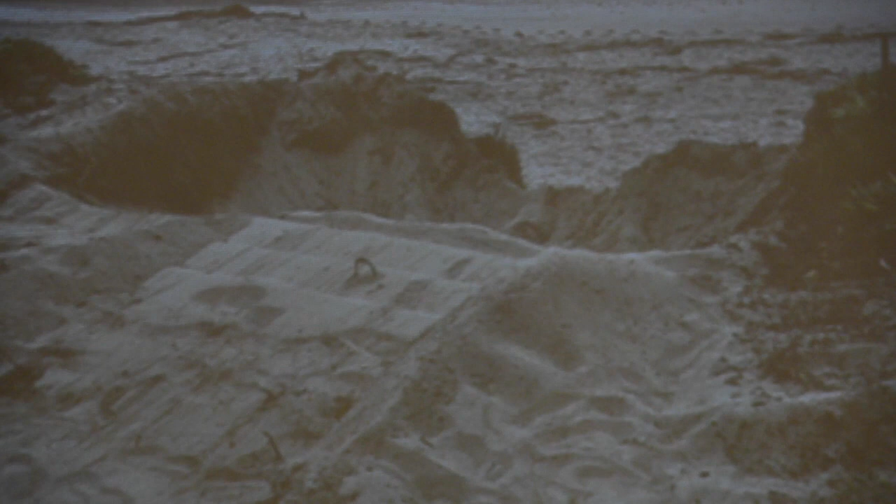Today I met on site with Daryl Sheffrey, the campground manager, and I've been talking to Tamara Geddick, the coastal analyst, working to come up with a plan to stabilize and clean up the site. We've got some ideas based on talking with Daryl. We still need to go back to the Coastal Commission. There's probably a good chance we can get on the consent calendar next time, unless they allow the work to go forward under an emergency permit, which they may. But I'm still working out some final details with coastal staff, so please be patient, I'll get it figured out. Again, I'm sorry for the miscommunication, I'm the one responsible.

Good evening, I'm Norbert Dahl. I represent John Van Hackle, as does my partner Stevie Dahl. Our client would not be in support of Caltrans remediating the violation without first presenting it to the community. Secondly, clarifying that Caltrans committed a violation of the Coastal Act, which is a very serious issue.

What specific section do you think we violated? 30600A, the requirement to get a coastal permit before any development. And you did grading, and destruction of environmentally sensitive habitat. No, that's not true, Ice Plant isn't considered sensitive. Dunes are considered ESHA, and I've been doing coastal management for 43 years.

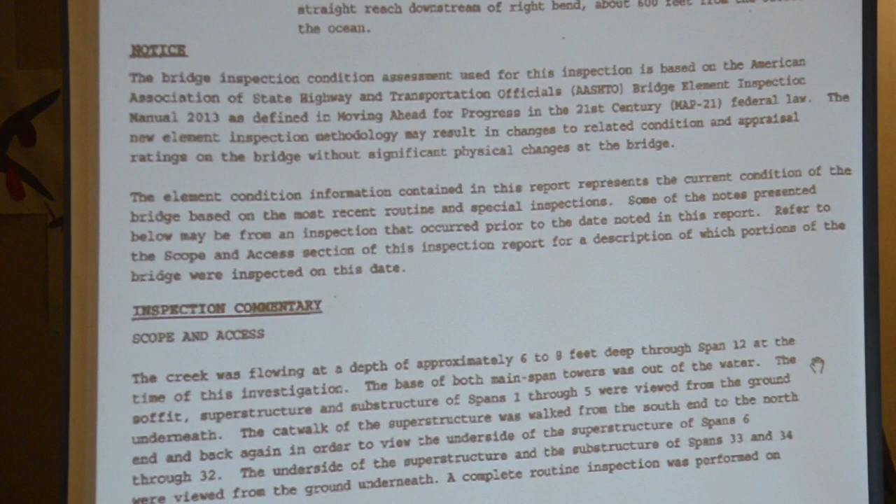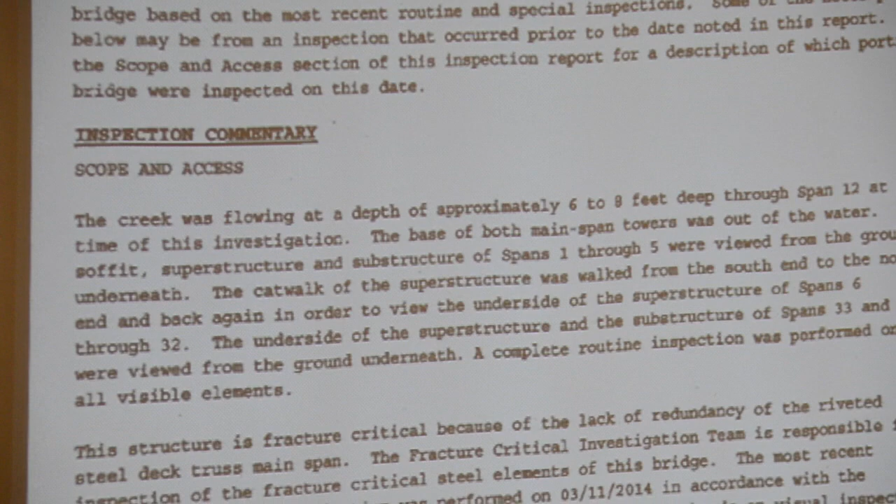Part of the reporting we do consists of a lot of commentary. We emphasize the written portion of our bridge inspection reports, and if one reads the reports, there's a lot of information contained in the commentary. But we're also required to digitize a lot of that condition into numerical data suitable for use in a bridge management system. These are algorithms used to determine basically the needs of our nation's infrastructure.

In 1972, up until the early 90s, the way to do this was to assign what was called a condition rating, or component rating, to the major components of a bridge structure: the bridge deck, where the tires really meet the road—that portion that supports the vehicles; the bridge superstructure, which supports the bridge deck; and the bridge substructure, which supports the superstructure. Each of those three main components was assigned a numerical value of 0 through 9, 0 being terrible and 9 being terrific. Those values are still used to this day. So when one talks about the component ratings or appraisal ratings, that's what we're talking about—these values of 0 through 9.

In the 90s, though, you can see that the simple assignment of a single digit number to describe a complex structure, such as the Albion Bridge or the San Francisco-Oakland Bay Bridge for that matter, was kind of oversimplified. So element level bridge inspection data collection was recommended by AASHTO, and Caltrans adopted that in the 90s, and we began collecting element level data. This means we took a complex structure like Albion, took the component of the bridge deck, and broke that down into its constituent subcomponents. Each of those subcomponents was assigned a specific condition, and the quantity of that specific condition was digitized. That occurred for the superstructure elements and the substructure elements.

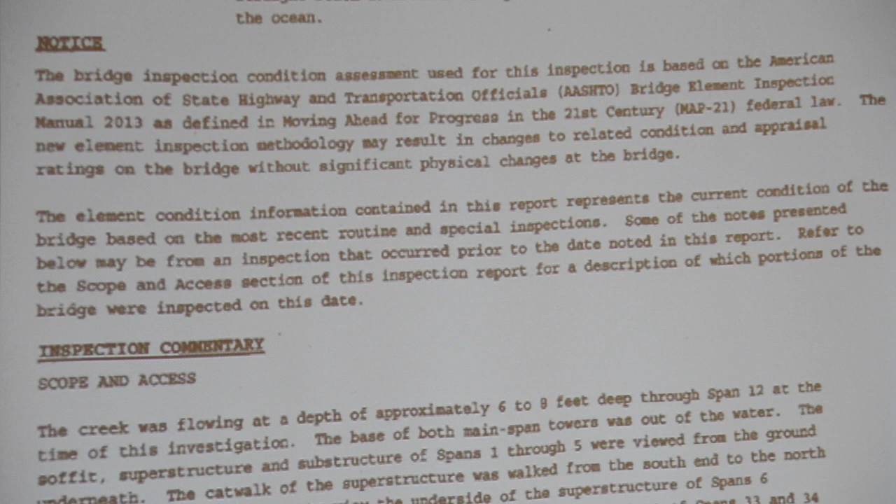But we based it on that, and we knew that there was going to be a change. We knew that when we did this, those component ratings that had been stable for some time were going to undergo a change under certain structures. So on our bridge inspection reports, we put this notice front and center. I don't know if you could read that, but I'll read the last sentence of the first paragraph: the new element inspection methodology may result in changes to related condition and appraisal ratings on the bridge without significant physical changes at the bridge. We knew that was a possibility, so we put that out there as a notice. All recipients of a bridge inspection report - keep in mind about half the bridges in California are owned by local agencies, and they do receive these reports - we wanted to make it very clear that there was going to be a change and we were aware of it.

After July 2014, we kept a very close eye on how these appraisal ratings were being calculated by our algorithm, and we recognized within 8 months that a revision to that algorithm was required. So in July 2015, we took our own in-house algorithm and made an adjustment to it. What that did, and what we saw, was a better alignment of the element level data to the bridge appraisal data, that 0 through 9 value, and we're satisfied with that. Now we expect another revision to that algorithm to occur likely in 2018, July 2018. We're working on that because it's important to make sure those component ratings are consistent, that they stand up to FHWA program review and audit, and that the data provided and used by bridge owners is of value and use. We don't take any of that lightly.

I also want to make clear that an individual bridge inspector, historically, could not make any physical changes to those component ratings. They're not allowed to. Our bridge management system does not allow a manual change to that component value by an inspector. The inspector is required to go out and make observations of the bridge using our element inspection manual as a guideline, and federal documents as a guideline, and AASHTO documents as a guideline. Quantify that condition, describe it fully, and then let our bridge management system and our algorithms calculate that value.

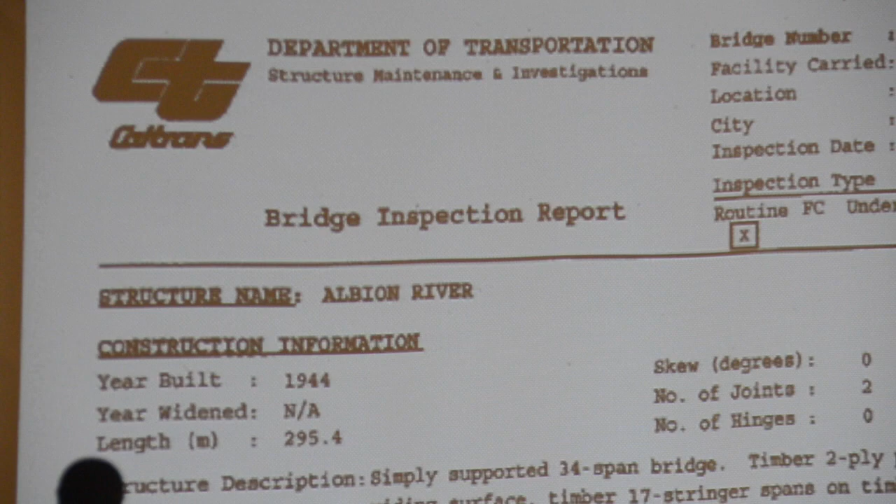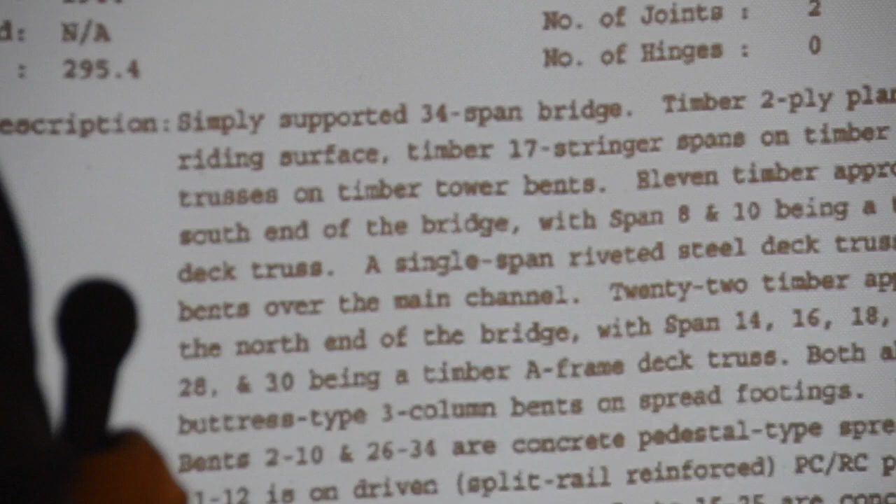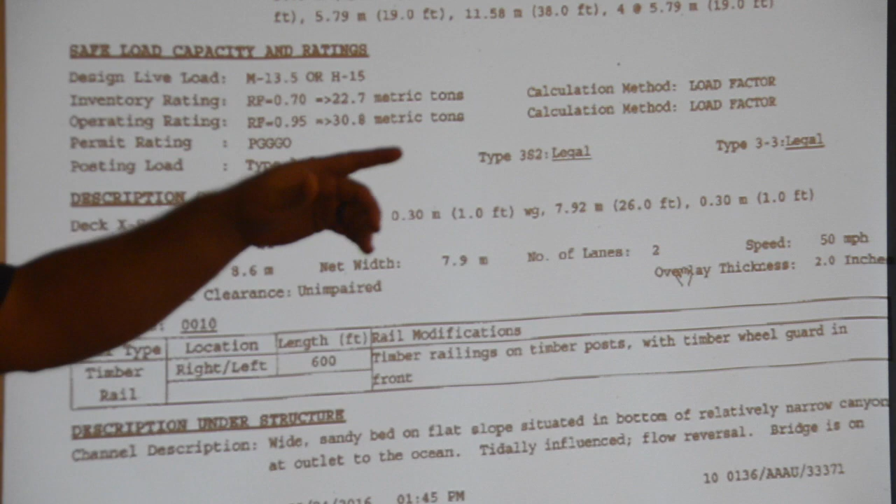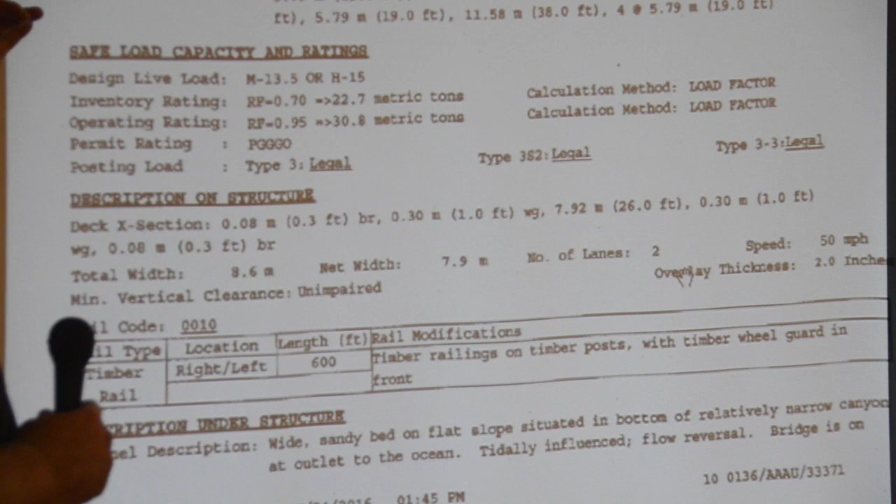So my staff are the boots on the ground, they're the guys that put their hands on the bridges, so I'm going to have more of a nuts and bolts approach to this. Forgive me, I didn't want to bring this up this late, but this is information on the bridge, the structure description, year built. Scrolling down, we get to the load capacity information. This is what I wanted to address regarding this gentleman's question. This is based only on vertical loads, we do not talk about seismic or anything like that. These capacities establish an inventory and operating rating to make sure it's good for legal trucks and permit trucks, and again, it's only vertical, live and dead load — no lateral, hydraulic, seismic, ice loads, wind loads, whatever.

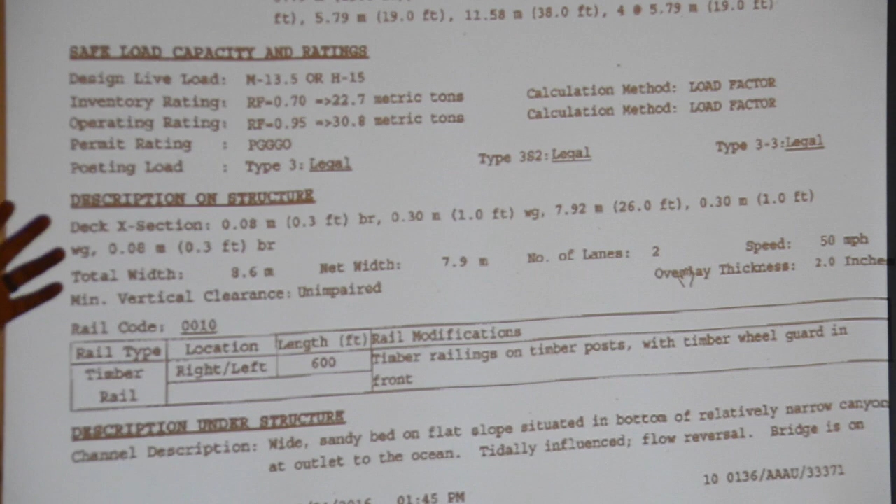Well, we actually will consider hydraulic loads if there's a scour vulnerability for a bridge. We get our hydraulics people involved with that.

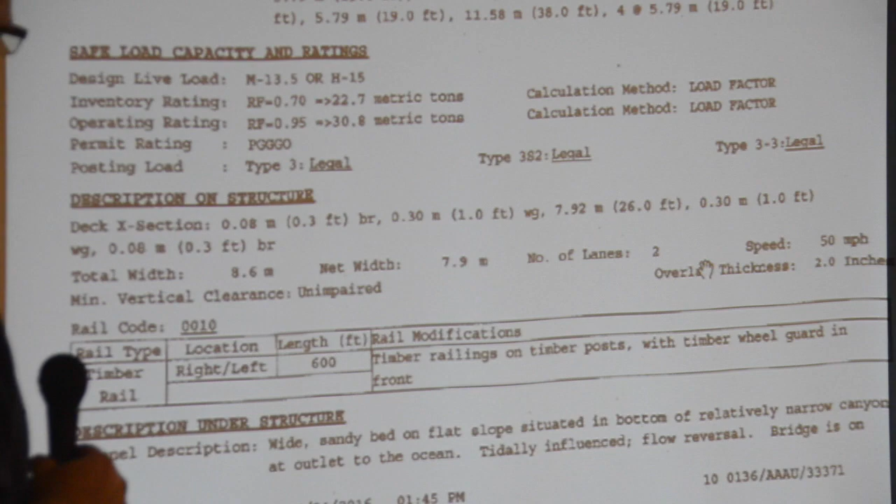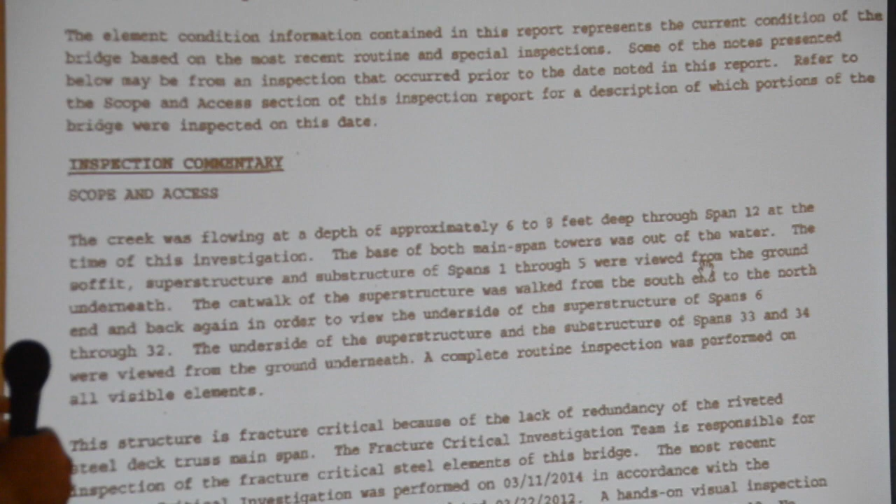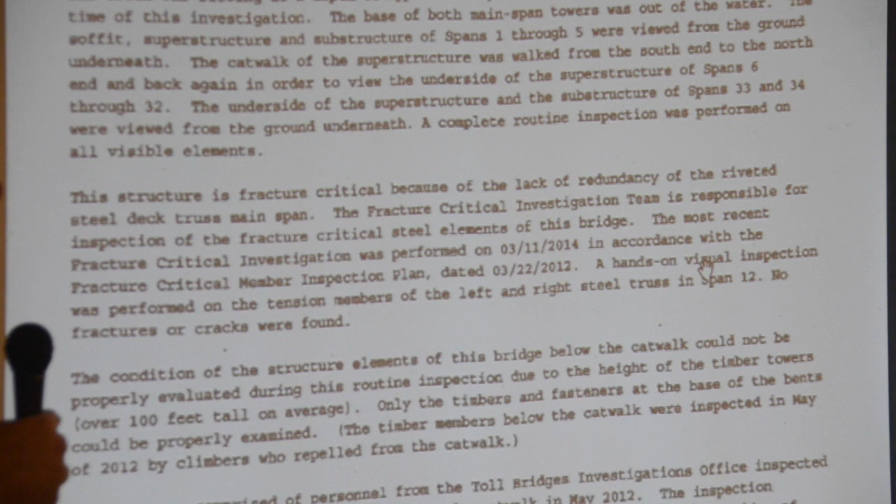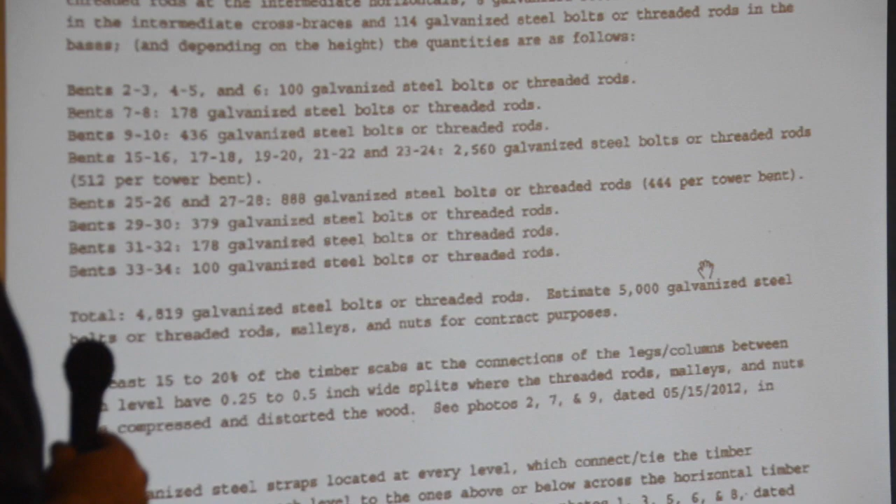More general description of the bridge — go ahead and scroll, it talks about the bridge rail. Scroll down a little more, please. There's that notice Errol was talking about. Now we get into the inspection commentary. This talks about how we access the bridge, what equipment we used, who helped us do it, whether the bridge crew gave us a traffic lane closure. This is a very complicated bridge to access, so the scope and access section is very long. Scroll down a bit more — there's a little history in here, miscellaneous.

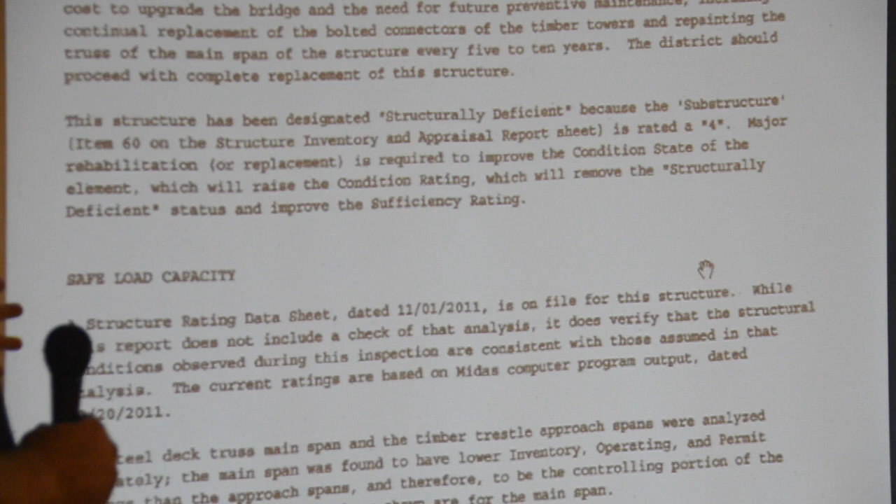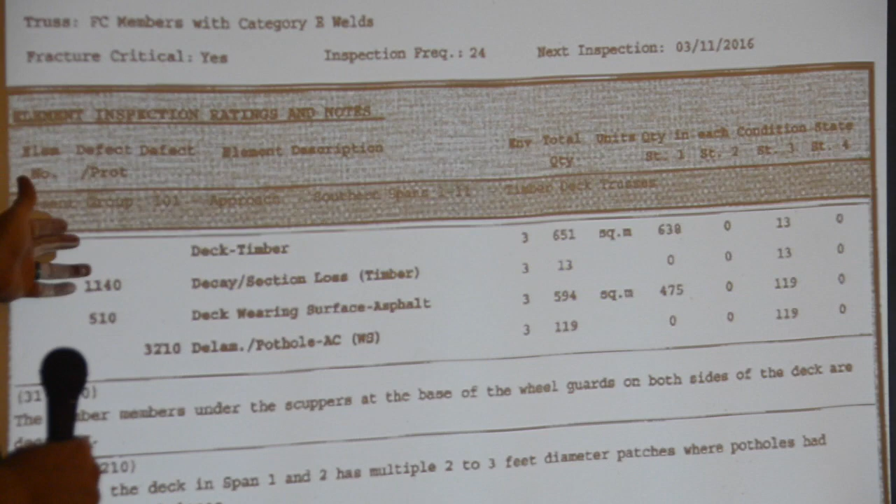So we talk about our safe load capacity again. Okay, this is what I was trying to get to, the appraisal ratings and how this affects it. This is the deck element and all the sub-elements that go through it. I'm trying to go through this quickly just to give you a general overview. Go ahead and scroll on down, I'm not going to make you stop, just keep going — there are a lot of elements in this bridge.

Before you go on, how much deferred maintenance has Caltrans allocated to this bridge? Deferred maintenance, could you define that? Unfunded work identified by field staff, by management, by headquarters — recommended somewhere up the chain of command but not implemented. It's in this report actually, so when we scroll down you can see that.

So we continue — we've got column elements, substructure elements, joint elements, bearings, the truss timbers, floor beams. Keep on going. Okay, we can stop here.

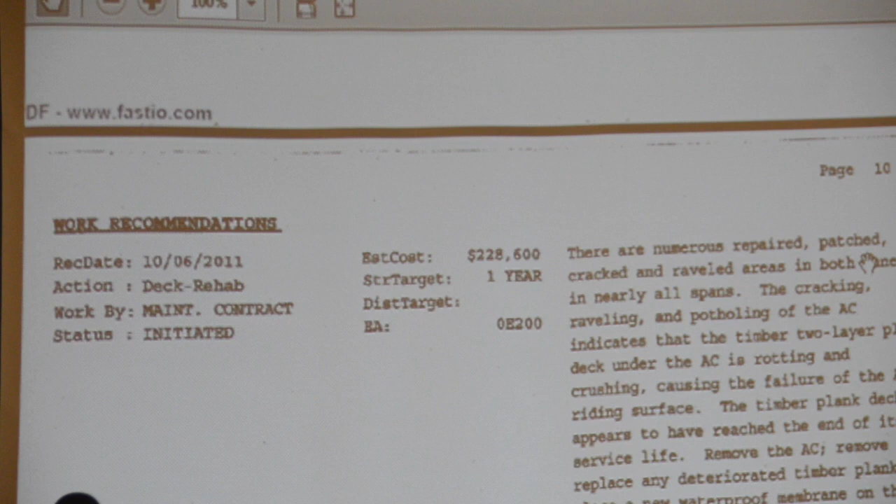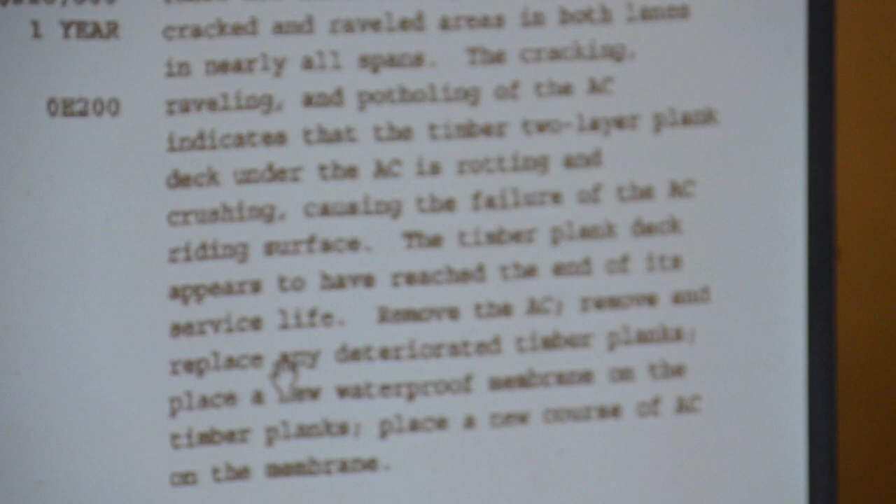This is our work recommendations — there's 2014, we have 2011, some of it's been initiated. All the information in here is, if we thought we needed to make a work recommendation, it's in here. Andy, right here, this is where we see the statement that the timber plank deck appears to have reached the end of its service life. That was based on the cracking, raveling of the pavement, and the recommendation by the district to go in and replace it.

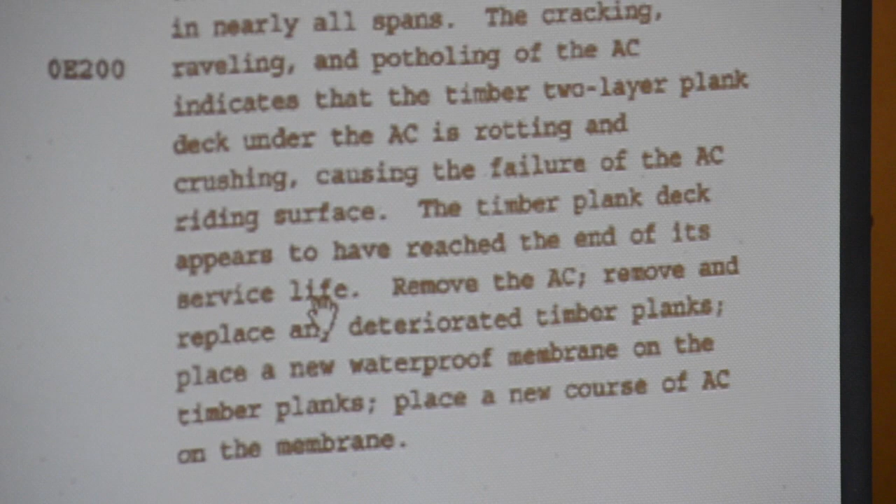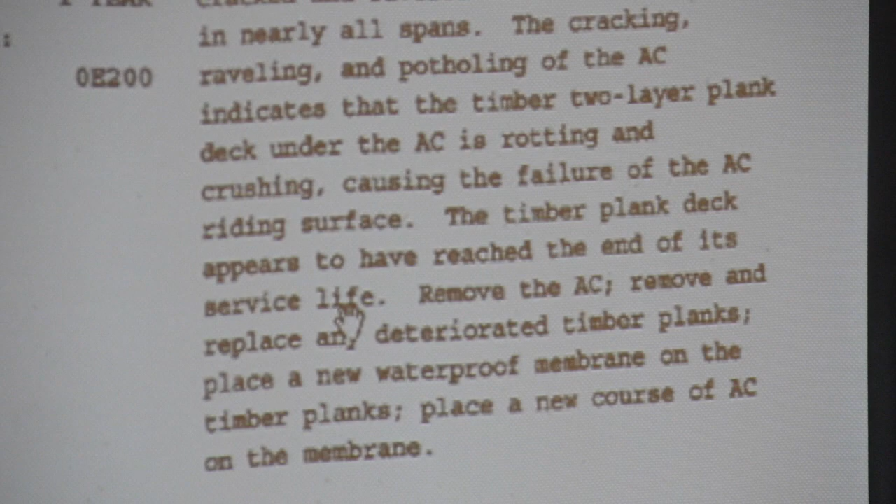But before that occurred, we had maintenance go out and take some core samples to determine the actual condition of the deck. There's a lot of talk going around that we were trying to scare folks into thinking the deck needed replacement, and that's not the case. This report was made and provided to the community.

Okay, once we get through this and I get to the actual presentations I wanted to show, then we can talk about the actual condition of the deck as it is right now. So we have a lot of work recommendations — go on back down to the last page right there.

So all of that element data that you saw beforehand, the computer algorithm that Errol was talking about, basically takes all that data and spits out these single numbers. That's why it's not a perfect system, and we've been having to tweak it. I just wanted to clear that up a little bit.

So go ahead and close this out, and then there's a file in there dated 2017, 10/11 photos. While that's coming up, I don't think that entire report is available on the web, at least the public part. You guys are privy to this. Formally, we would actually have people make a public records request to access it. So you were a little privileged to see that.

I'm not sure how we're doing that. I think the 2015 is on your website, Frank? Yes, it is, the 2015. This was the 2016, the whole thing? 3/24/16. I can't speak to what's on there, but I believe it's the 2015. If you could post this, this was the 3/24/16. That was an older report. This is only an example, right?

Again, you can't really see it, but this is really rusted, so we can just keep going. Can you explain what that is? It's a utility pipe attached to the side of the bridge. Whose utility was it? No, that probably is in the BIR, or at least in the database. I don't know, is it abandoned? Well, there's one, it's broken, so that makes sense. Or else the utility would have fixed it.

Yeah, so that was a water pipe that was put on the bridge in '43 to connect the water from the south side of the river to the north side, and it was never completed. Wow, I'm kind of amazed because sitting here, I've actually learned a lot about the history of the area. In my job I get focused on the bridge, and I'm just sitting like, oh man, I didn't know that. This is kind of crazy stuff.

All right, so this is a picture, and I have some attachments on some of these. I'm not sure if you can see them, but this is a picture of underneath the deck. Yeah, it's not showing up all the way. If you go to 100%, that little thing there, you just double click it. What is it showing? Yeah, that's why I have the attachment, because some of these pictures there's not a lot of reference.

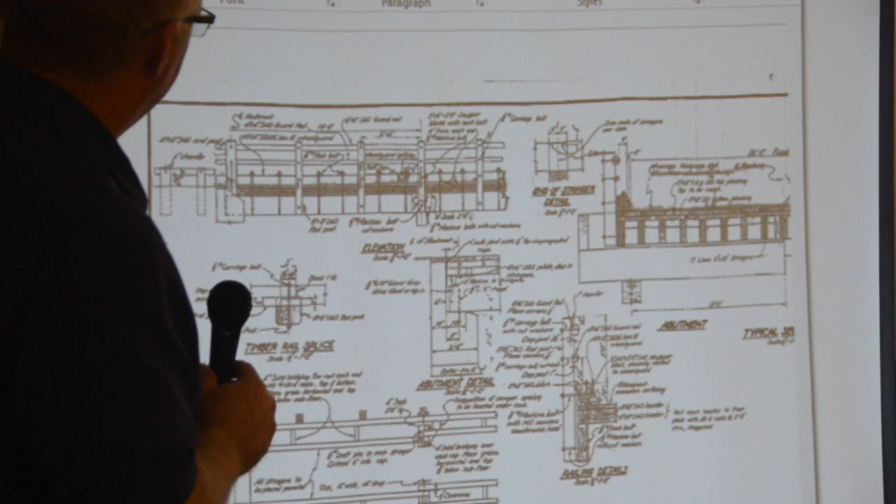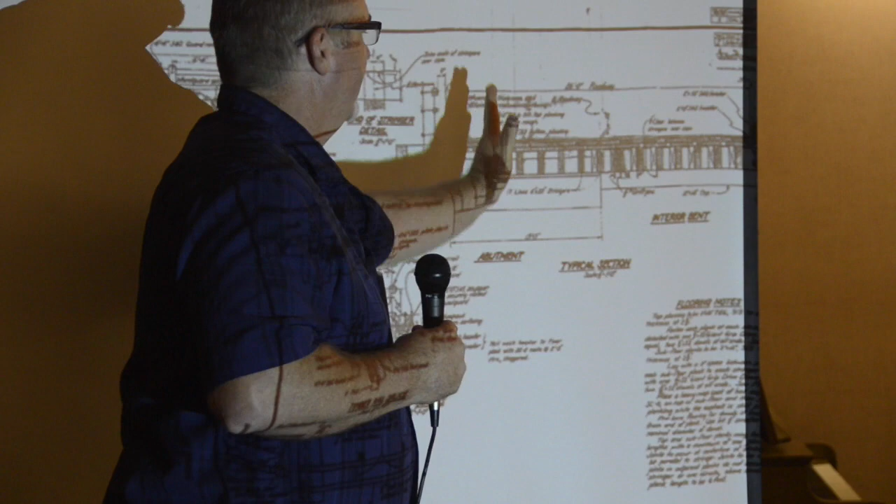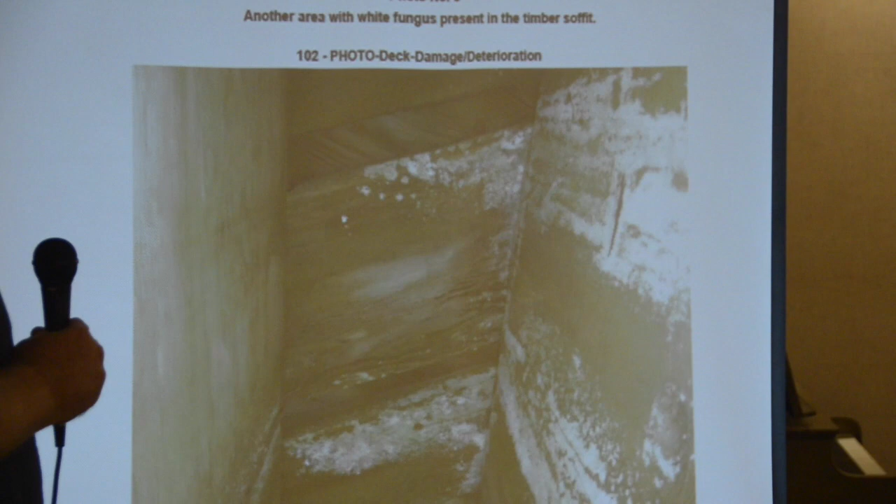Let me say right now that anything I show you, you should not be alarmed, because we don't close bridges that are safe. You might see something that at first might make you go, what the? But it's not horrible. We're just documenting unemotionally the condition of the bridge.

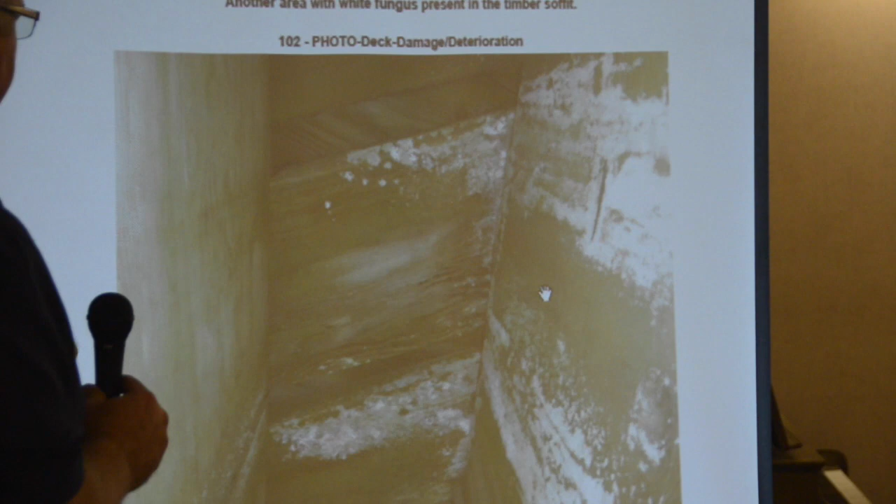White fungus is normal on the underside of timber, because water leaks through the AC, the asphalt, and it starts to grow this white fungus. It's an initiation of decay. Can that be scraped off or washed off? I'm not sure if you can really. If you get to it quickly enough, you might be able to use some kind of herbicide.

This guy can speak to that. So, any type of cleaning, sure, you can get that off there. It's almost certainly going to come back, right?

A mold or stain is inherent, it lives in the element. Right now, molds and stains are not classified as a deleterious effect. It's not like a fungus that gets in there. So determining what species it is and its effects on the structure is something we're looking at.

What Andy is making a point of is that we have photographic documentation, up close. When we say we have this condition, it's backed up by a picture. That's in the record, on top of the engineer who signed and stamped the report saying, I have this condition. So these are documents not necessarily intended for open public viewing, but certainly suitable for it.

We use these documents internally. If Andy's engineer comes to us and says, hey, I think I got a problem with that bridge, we say, well, prove it. What problem do you have? And he brings us this data. So in any case, getting back to Andy.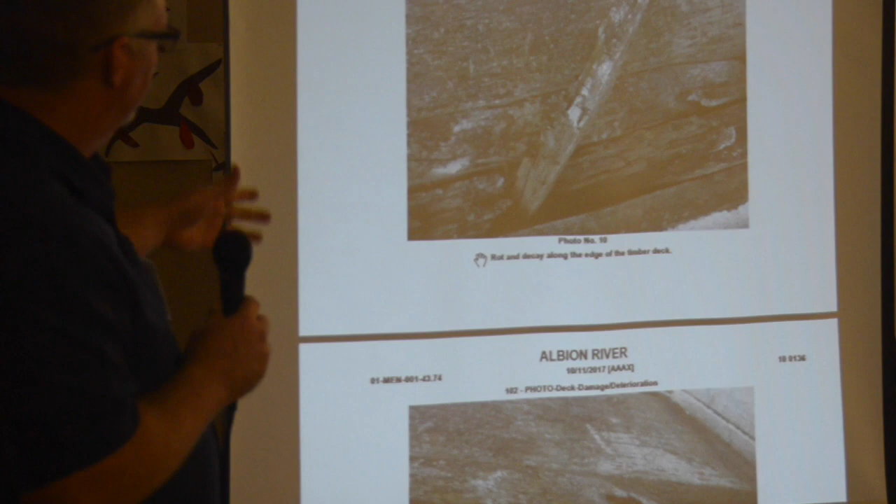Is there another attachment up there on one of those other timber deck ones? Photo 9 was actually very descriptive, could you go up a little bit? Yeah, there was another one. These dark ones here are actually a wide angle - not that one, a little further down. Could you stop right here? These pictures are actually more wide angle, Frank can probably see a wider view of the girders and the bottom side of the deck.

The water staining and the fungus is in large areas on the bottom of the deck. Okay, and if you stop at photo 9 for a moment, please. Yeah, that's where my attachment is too. So the question is, how does it happen that a deck drain, which is an integral part of the bridge structure, is allowed to clog or in some manner not function so that the timber adjacent to that drain rots?

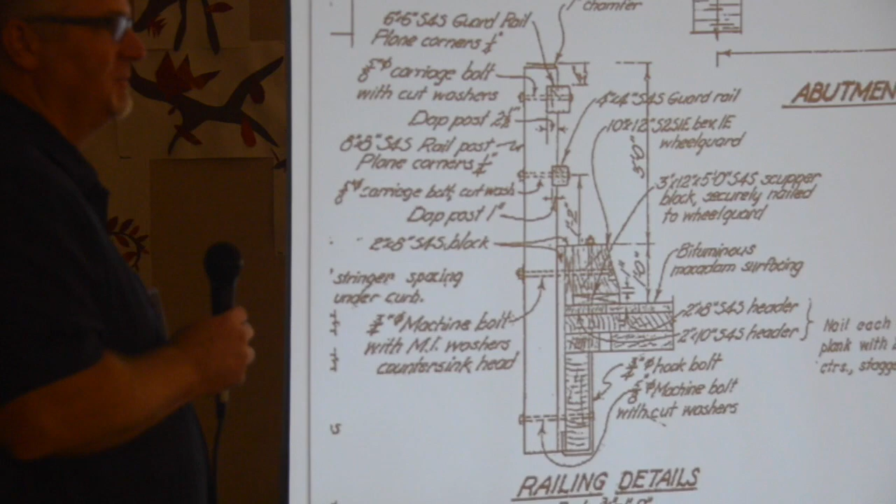In an ideal world, the deck drains would be cleared, you're correct. But that's, as all of us know from the gutters around our houses, that's a primary function of maintenance of any structure. What's the point? The point is, to the extent that the algorithm shows deck decay, how much of that is actually a function of that part of the bridge not being regularly and completely maintained?

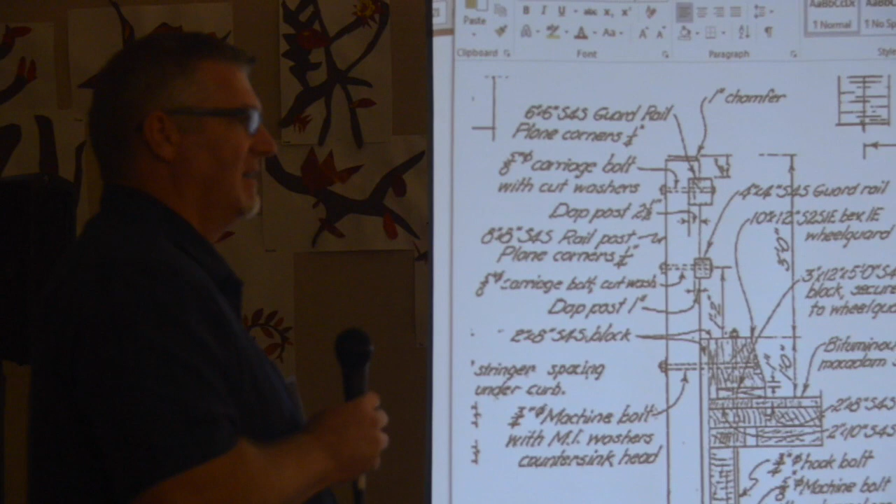And do we need to boost the maintenance budget to get that done? Oh, I would be all for a boost in the maintenance budget, having worked for maintenance, but the bridge crews are taxed heavily. And they do the best that they can with the inventory that they have to maintain. Sometimes, yes, deck drains get clogged, and that's just life.

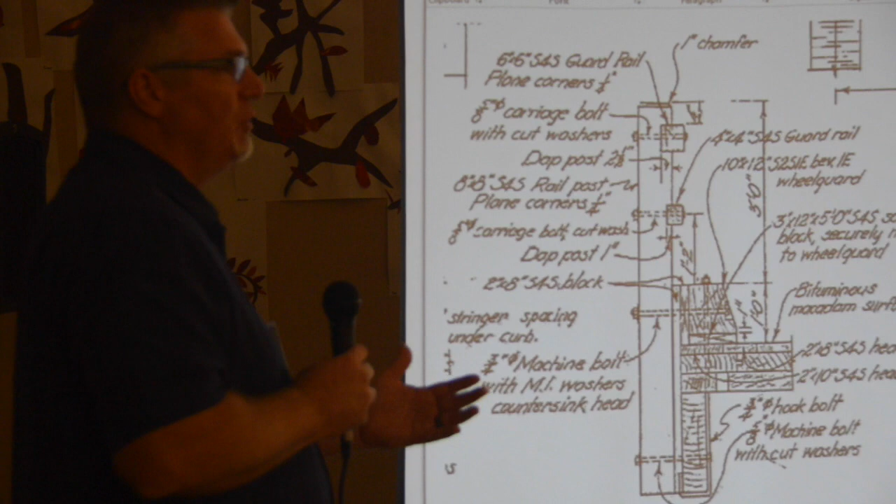Can't fight entropy. So, but yeah, you are correct. I mean, and what you're seeing there, these pictures we're looking this way, and you caught that. So you can close this out now, Frank. I'm just trying to give people a reference on this.

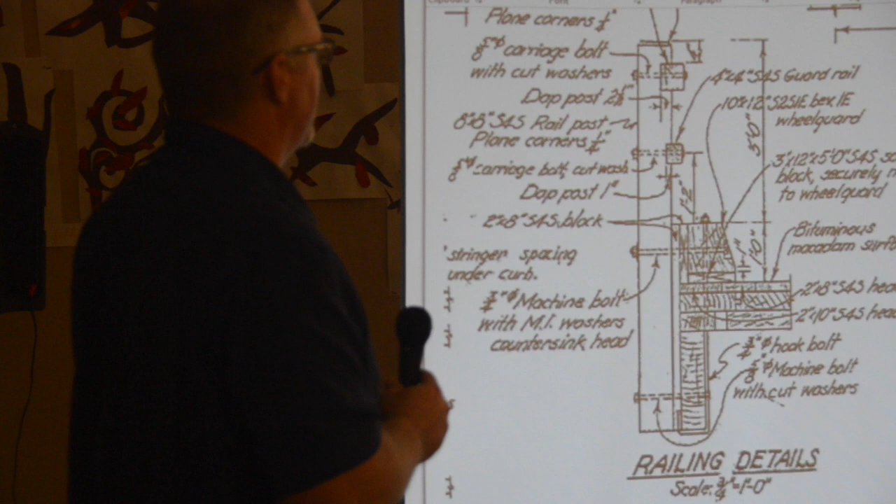You know, it took us 6 years to get the speed limit on the bridge changed from 50 miles an hour to 35. And then they finally reduced the speed. They put it right smack at the bridge instead of allowing people to know that you've got to slow down a little bit ahead, because it's 50 miles an hour about a mile away. That's not a change in the speed limit, that's an advisory with radar feedback sign, and that was the location that the traffic safety selected.

That's not a speed limit? That's not a speed limit, that's an advisory. It's still 55 miles an hour except north at the bridge, and it's 50 miles an hour speed limit.

Well, why is it so nuts like that, Frank? Pardon me? Why is that, that is nuts. Well, we had CHP here explaining what speed zoning is about, and I think the explanation given was based on what the 85th percentile for drivers along that section of highway is. And we can have them back again, but I'm sure you wouldn't want them to come here, right?

Does the speed limit somehow relate to what I'm presenting? The speed limit relates to the deterioration of the deck. The faster you go over what becomes potholes and stuff, the more damage. No, I think this is a wet, dry environment because, as someone pointed out, the deck drains get clogged. And no, I'm not talking about your picture.

Okay, well, we're running out of time. We've got... I'm talking about excuses. We've got about 10 minutes, and then we're going to close it down because we said 8:30.

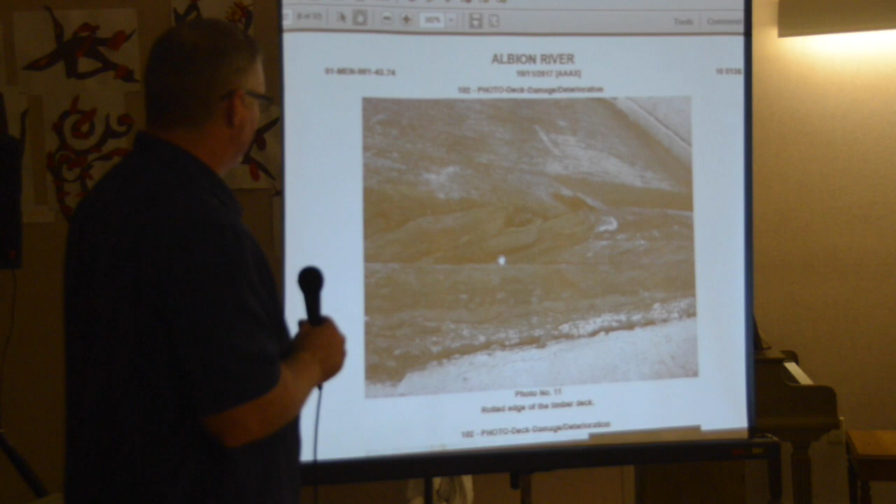Another picture of the deck, showing more rot underneath the deck drains. You can see how the timber, where it's exposed to the wind, the moisture, the sun, and if moisture is trapped in there, it's rotting and getting soft. But again, it's confined to the edges of the deck where the traffic is not on.

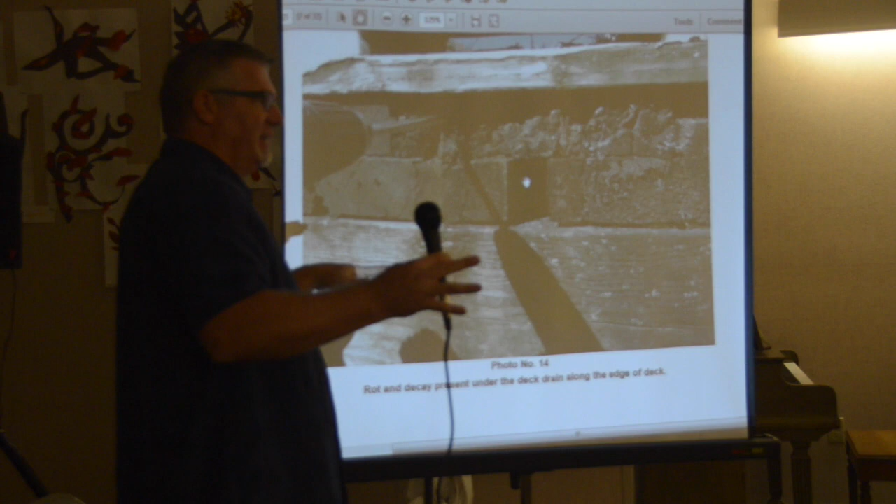We still consider this a fair deck. We're not saying that we need to put restrictions on this deck, okay? We're just documenting the condition. At that one point, he was documenting how much the drill went into the edge of the deck. More timber deck, okay.

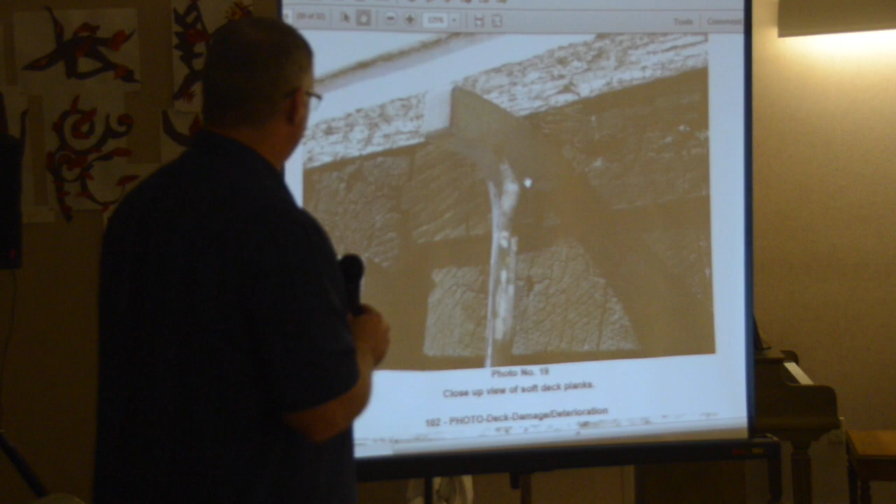So you can see we got some soft deck on the edges, and also some fungus initiating decay on the bottom of the deck. Here's some bolts. We're trying to document some of these - you can't really see it well, but there's some pretty rusted bolts there. These are in the diagonals of the timber truss.

Do you have a measurement as to how deep the rust has progressed? Well, there you go. At this point, it's like we need to replace it. The simple fact, sir, is that when we see corrosion to the point where it advances like that, our assumption is that it's throughout, and we're not going to make that measurement. We're going to remove and replace.

All of them? The ones that looked like that, yeah. But what's the threshold - 10%, 20%? Failure at that point? They know it when they see it. There is a zinc coating on the bolts. As long as the zinc coating is intact, and we still see corrosion protection there, the bolts are performing their function.

If I see any kind of measurable section loss, I'm making a recommendation to replace it. Any measurable section loss - we strive to keep the bridge in the as-built condition. So the 816 bolts that were replaced were the total out of the 4,800? That was only done in this last contract. Prior to that, District 1 Bridge Maintenance was doing the work to replace bolts.

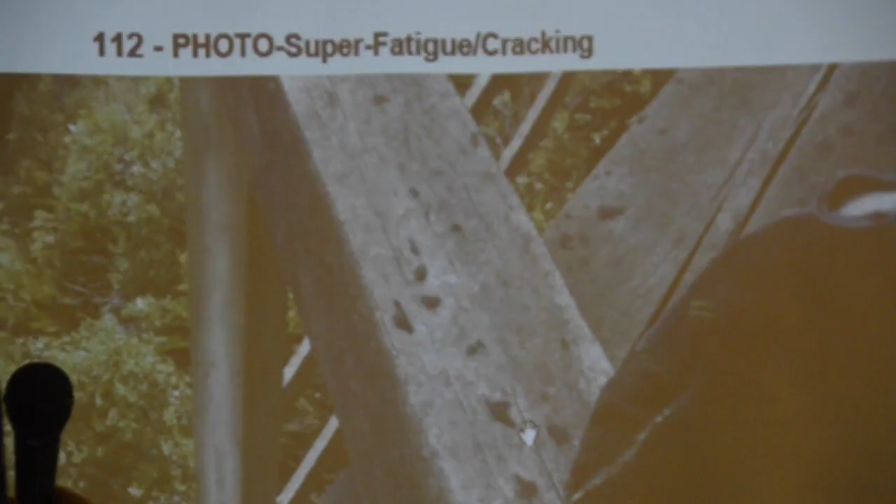There was a couple pictures, like I think one back. Well, in general, we're documenting the checks and the timbers. This came up - the gentleman brought up that the checks are going to introduce a way for the moisture to get into these timber members. We're seeing that pretty much throughout the main timber members, the checks. You can see these in the vertical members. That was just an overall view. They're pretty much in every timber member.

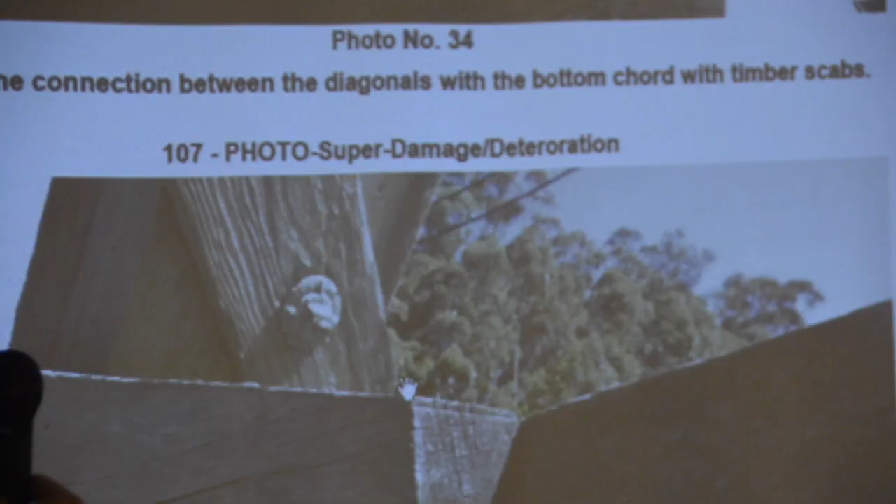We're just showing the depth of how far the awl is going into those checks. This is a detail from the bottom of one of the truss connections. These connections are split on what they're called scabs, and they will need to be replaced. But again, we're not talking about a safety issue, we're talking about a maintenance issue.

Was that the as-built way it was done? No, that's what I'm saying, they will have to be replaced. And like I said, the draft report is in progress. We don't have a complete report to show you yet.

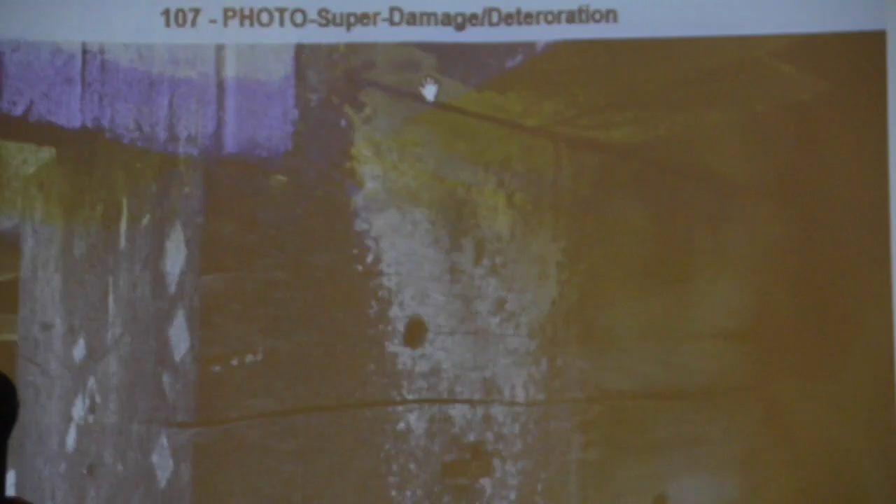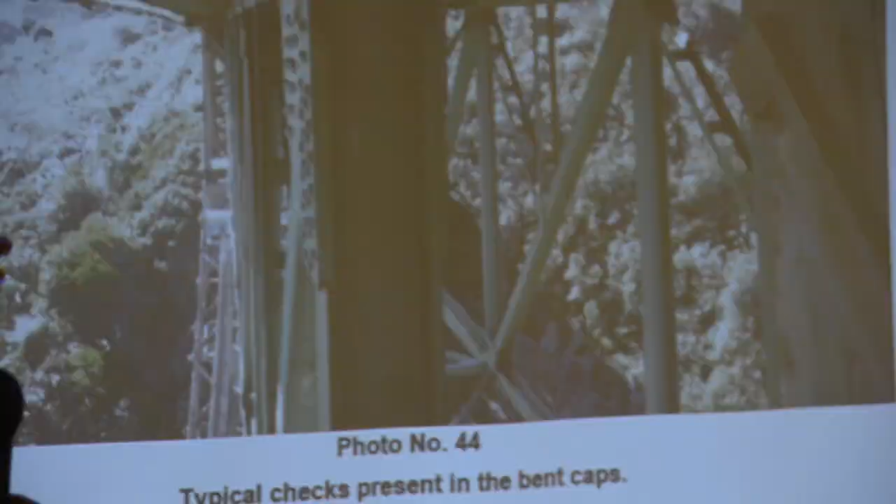And we're looking at decay checks on the timber bent caps. See some more checks in the timber bent caps. It's going to be more access for water intrusion and decay. That's a pretty darn important element there, right? Just so you know - are you able to determine whether that happened last year or in 1947, as checks?

That's a good question, I'd have to look into that, and we'd have to examine the bridge record. Keep in mind that when graded timber comes out of the mills today, a certain amount of checking is accepted, particularly in wide face timber elements. What it was graded at in '43 was probably much different, much more stringent.

Is this all Douglas fir? The towers are Doug fir. The trusses, the timber trusses and the timber decking are clear heart redwood. And that's clear heart - particularly resistant to rot? Well, clear heart redwood of that era, I think those were old growth trees. They had to be - the rings per inch, the grain per inch is pretty darn dense. We can't get those anymore. And you're right, they're resistant. They are, and some of these are old growth Doug fir as well.

But I'm going to tell you, while it's resistant, that means it takes longer than, say, just a stick on the ground or so forth. It's still going to happen. It's still going to happen, right?

Yeah, question - are you sure on the redwood, it was a restricted item in World War II? I saw some correspondence, and I'm not going to try to make anything up here, but I think there had to be a special plea to go after that, because I think at first it was denied. The War Department said no, and then we came back at them and said you've got to have it, and they were able to get some shipments. But you've got to look in the record for that - I don't want to state that as fact, that's an anecdote.

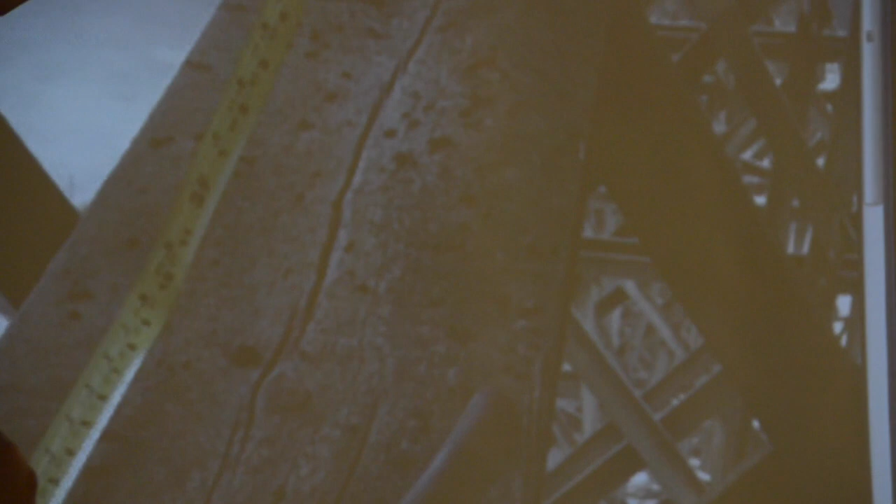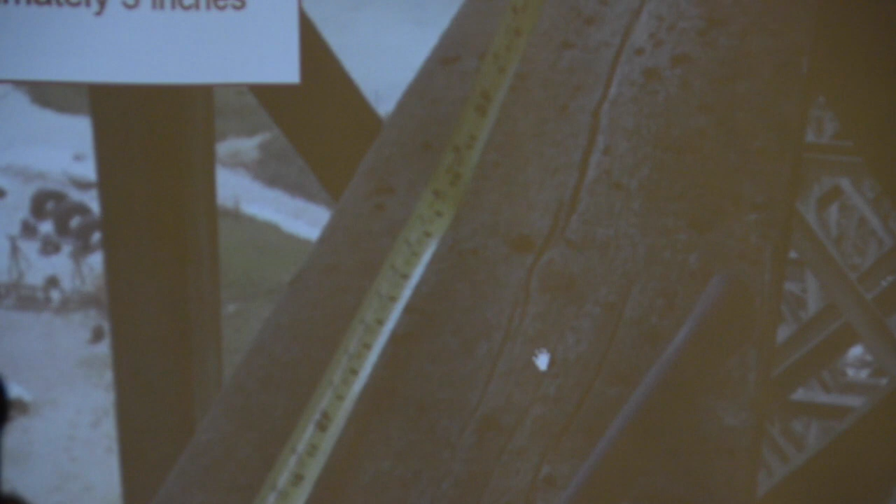One of the things that, again, is not a safety issue, but it kind of illustrates the decay, especially in these horizontal members. The horizontal timber where we've seen evidence now where the checks are, especially where horizontal and the water can collect. And there's beginning to be some significant rot in the horizontal truss members. And then if you could bring up the other one.

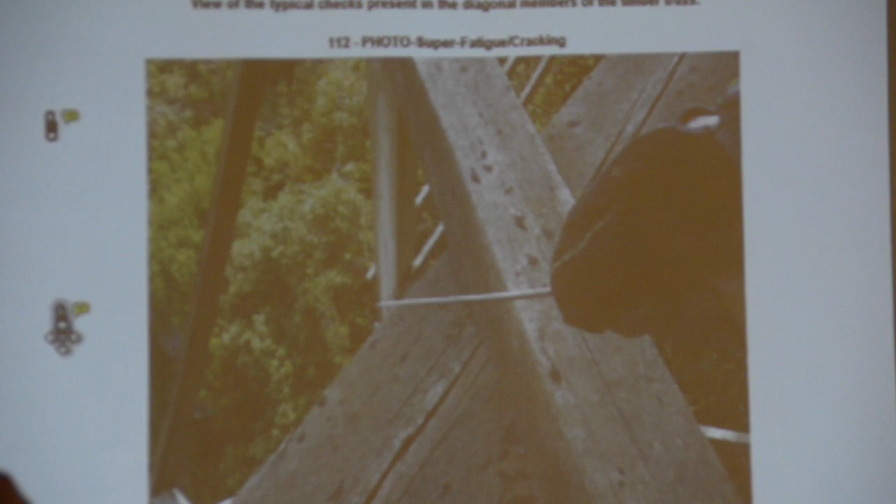I think the other one is a little more advanced. I want to zoom out on that so you can see what's happening with it. We got the checks, water's getting in there, and it's creating a wet-dry condition.

Okay, we can go back down to the shear ring. We found evidence of one shear ring that we can actually see, due to the way it was constructed, the steel strap. It was a timber to steel strap shear ring. It's a little further down, and there, it's up there. So this is the steel strap. This is near the base of one of the towers. That's the timber, and then this is the shear ring. Probably because it's exposed, it's got some corrosion on there.

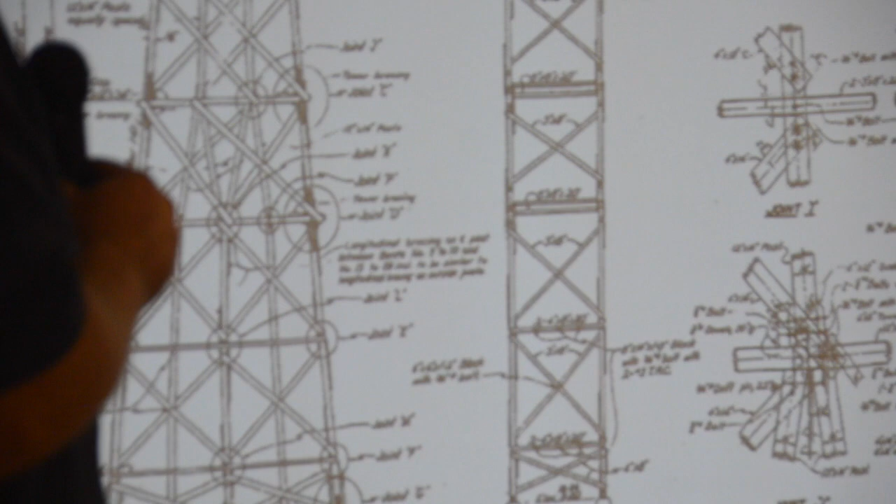If you go over to those attachments and you hit that first one, I wasn't sure if everybody kind of knew what the shear rings were all about, so this is the big picture on the trestle. It calls for all these shear rings at the different locations and which ones they want. Then you can close that out. I got a detail right there, I think it's a little closer.

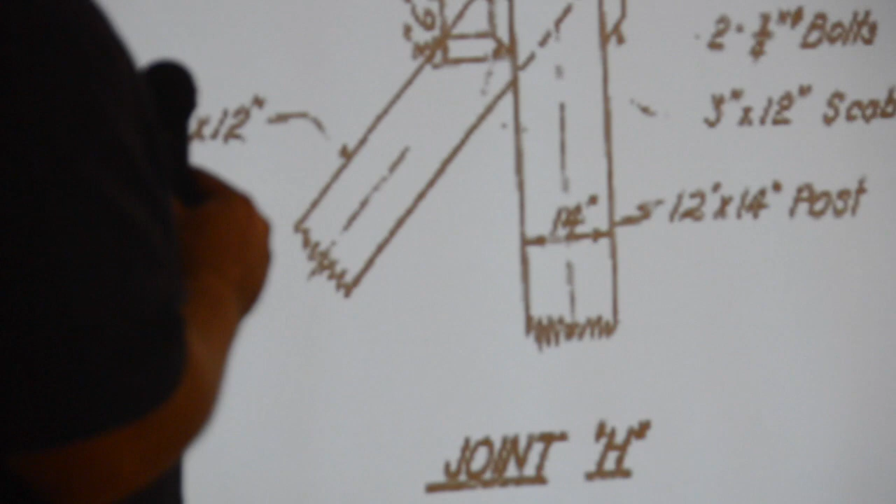So I think it's over that way. No, it doesn't really matter. Just for people who are maybe not aware, whenever you have timber and timber with bolts going through them, you have to have these shear rings. The next attachment I think is a little clearer. These are the as-builts, but the next one, I just found a picture of one. It kind of shows more clearly what it does. You can zoom out a little bit on that.

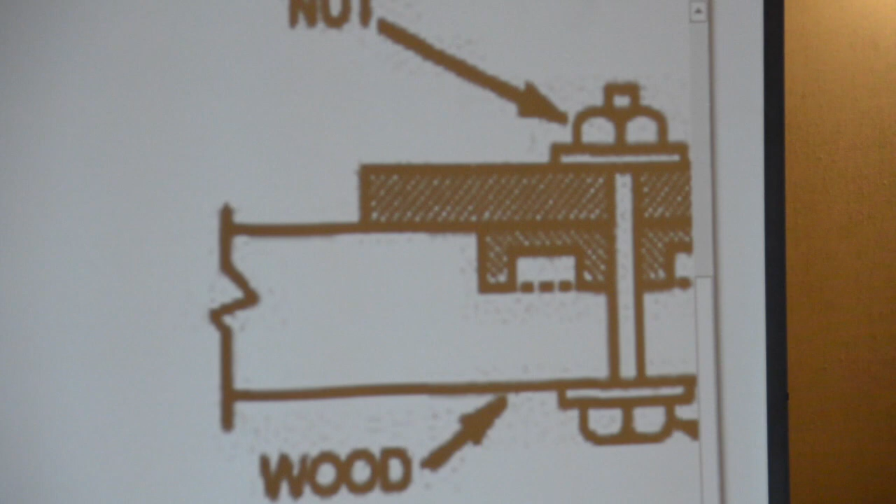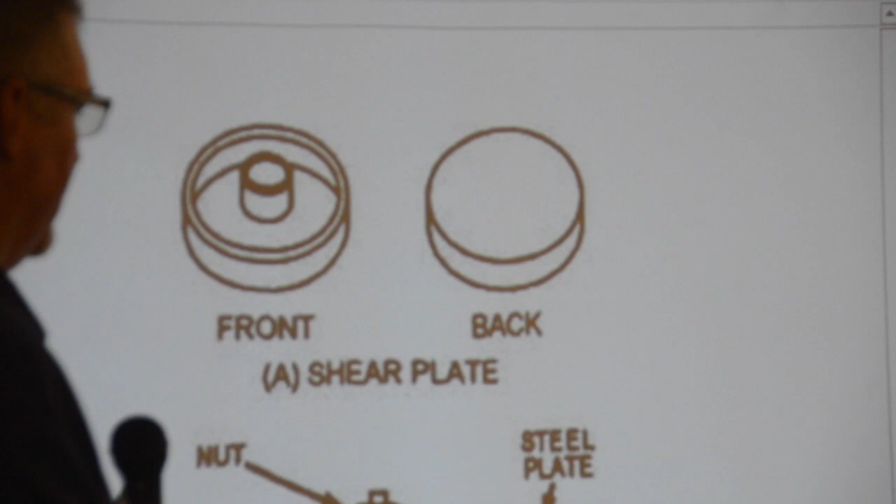Okay, so the one I pictured of the rusted shear ring, it was a timber steel, and there's the shear ring there. And then if you scroll down to there, you can see why we can't see the shear rings, just to make it clear to everybody who wasn't sure what was going on. These are inside the two timber pieces.

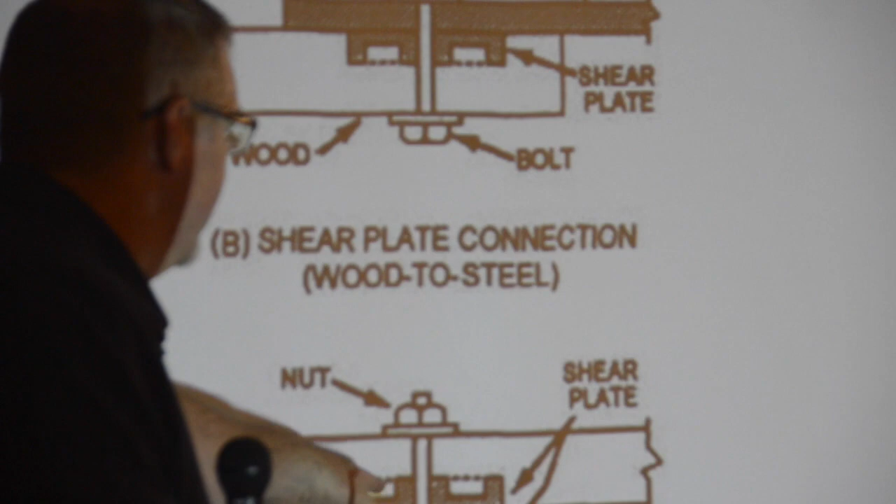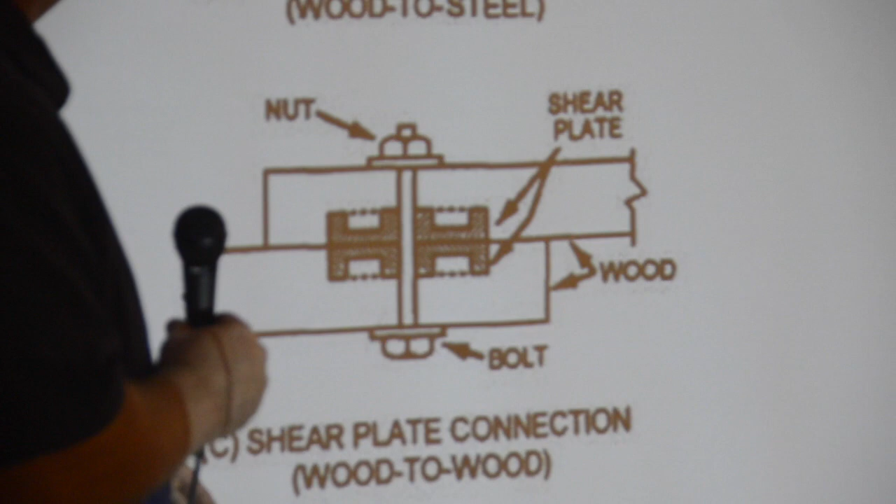Explain that a little more, we've heard that a lot. It makes a bigger area to hold. So what this does is when they're assembling these timbers, they have a little jig and they cut this out to the size of the shear ring, and then they put the timbers together and bolt it together. This thing is designed to resist this kind of separating, like shear.

So I can add a little bit to that. I believe you were kind of on point there. Timber crushes, right? Timber's strength perpendicular to the grain is not terrific. So a bolted connection like that, with steel against timber perpendicular to the grain, it's going to crush if the stress is high, and stress is force over area. So you're absolutely right. These shear rings are put in there to make a larger area and distribute the forces over a larger amount of the timber so that the design shear, the design demand on that, is met with a reliable capacity. So that's what they're there for.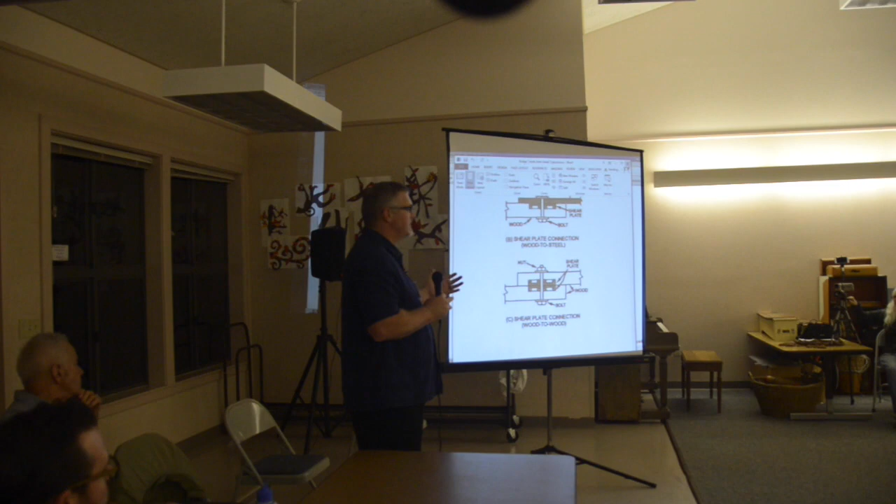And as was pointed out by Mike earlier, when these things get stressed up, that's when we're going to need them. I kind of rushed through them in the interest of time, but all the pictures we had before of all the bolted connections, we don't see any indirect stress. We don't see any shifting or anything like that. All we see is the rusted bolts at this point.

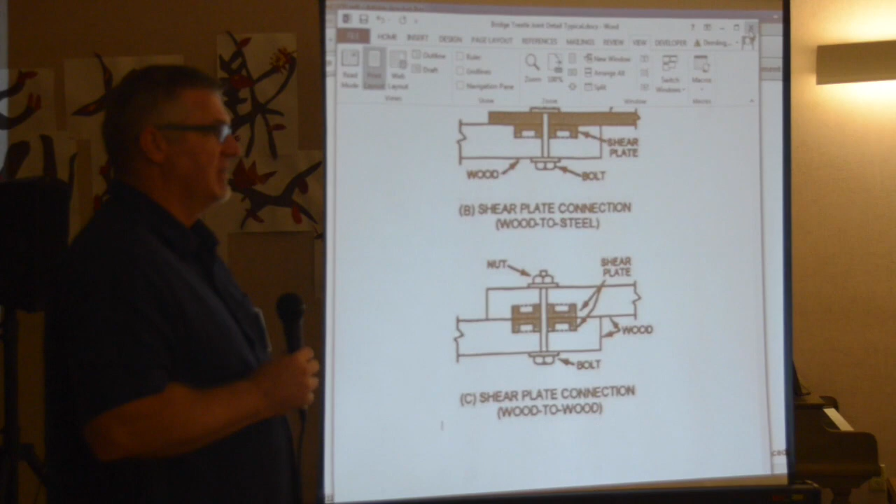I'm going to wrap it up, Andy. We're at 8:35, so 8:30. I got the music, they booed me off the stage.

Can you tell me the dimensions on those shear rings, how thick the material is? And it looks like they're shaped kind of like a cup, or are they just real thick?

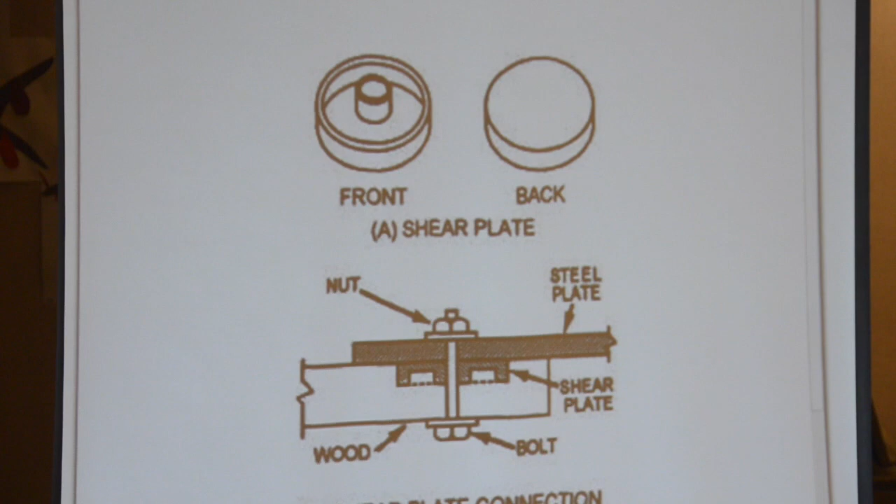Go to the top of this section right here. Well, just remember, this is just what I got off the internet. There's the shear ring right there. This is just for illustrative purposes only. This is similar to what's in the as-built, but not from the as-built itself. The specification on the as-built called for a specified part or piece that was available in the day, and so we found a pretty good facsimile of that here. Anyway, thank you again for the opportunity to present this, so thank you.